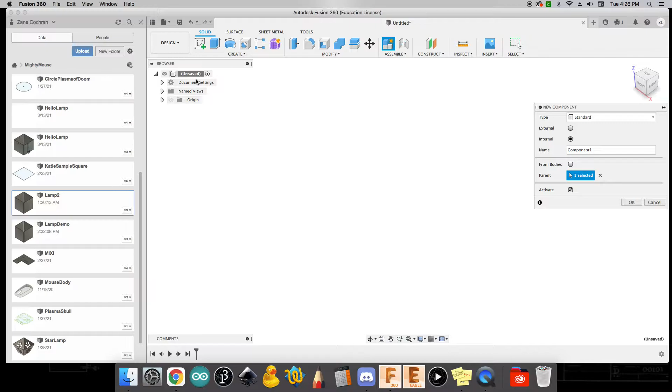So the first thing that we're going to do is we're going to go into our document settings and change our units over to inches. And then we are going to click here on unsaved and create a new component, and we're going to call this component lamp. Okay, at this point I'm going to go ahead and save and call this sample lamp.

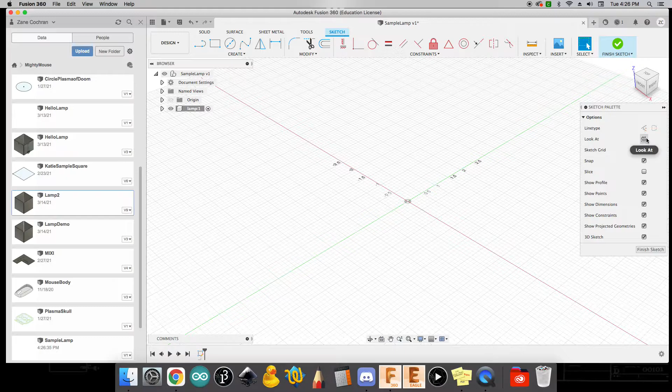And so now we're going to come over here to the sheet metal tool. We're going to create a sketch, and we're going to do that on the top face here. And I'm going to make a center point rectangle that's going to drag out to the center, and I'm going to set it to 3 inches by 3 inches. Okay, so at this point then I can finish the sketch.

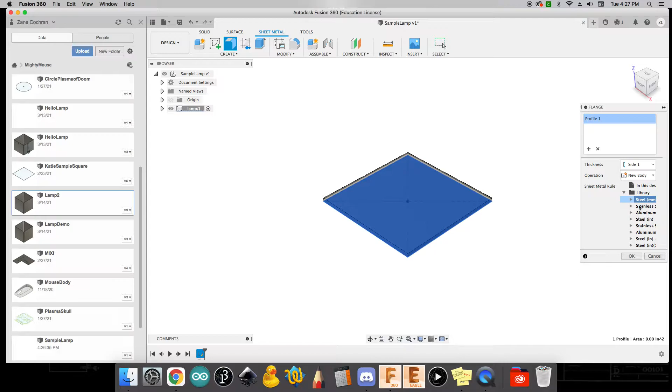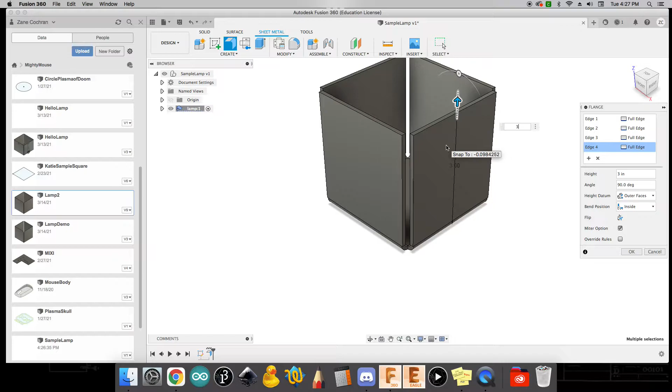And the first thing we're going to do is we're going to create a flange on this surface. And you'll notice it's going to pull up some rules here. We're going to talk about these in just a little bit, but we'll leave this as is for now. And we can click OK. The next thing that we're going to do is we're going to create another flange, and we're going to do it on these top 4 edges here. And we're going to drag these up an additional 3 inches. Okay. So here we can kind of see the sides of the lamp coming up.

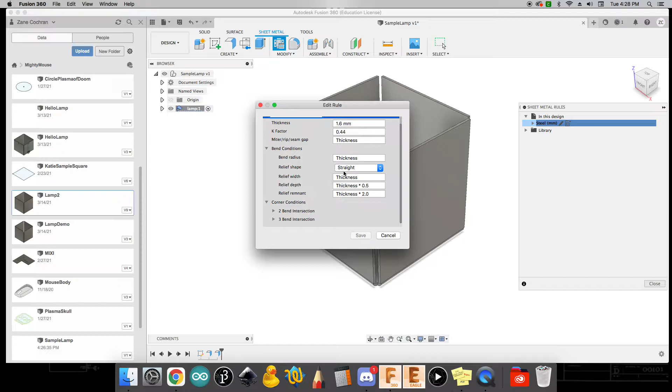Now at this point we are going to modify our sheet metal rules. We're going to click on our steel millimeters here, and we're going to edit this rule, and we're going to change the thickness to the actual thickness of our metal, which is 1.6 millimeters. So we'll click save, and you can see how it thins that metal out, and it's also leaving these openings as well. If we come into these, we can see some additional elements that we can change. For now, we're going to leave these as they are. So we can click close.

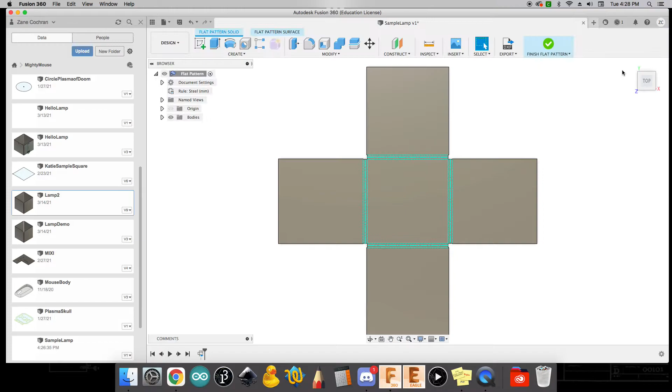At this point then, we want to visualize what this is going to look like when it's perfectly flat. And so we can create a flat pattern, and we can click on this stationary face here, and it's going to unfold everything relative to that face. And so now we can see that it's flattened everything down. And what we'll do now is we're going to right click on here, and we're going to create a sketch. And we can see that sketch right here. And we're going to start making some modifications to our design here.

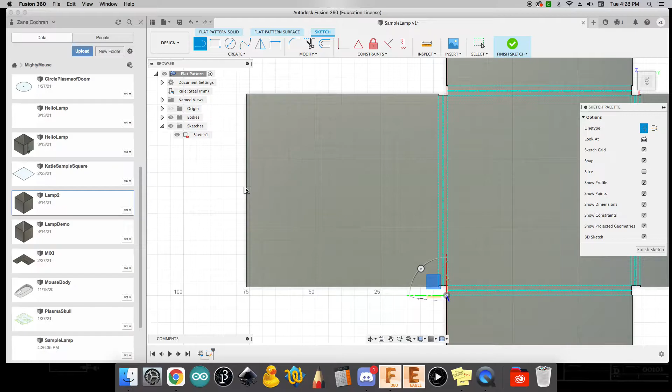The first thing we're going to do is we're going to create some lines just to keep track of where we are. And I'm going to come out to the middle of each edge, and I want to look for this center edge here. That should pop up. I see it almost there. Yeah, right there. And we are going to come in 90 degrees, and you'll see how it's wanting to work in millimeters, so looks like we need to go through and change our units one more time over to inches. Okay, so let's try that again.

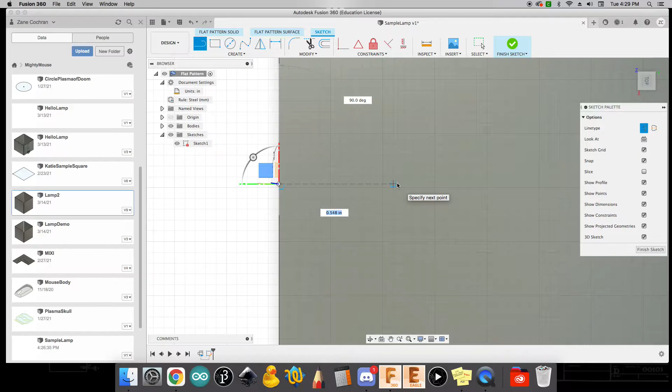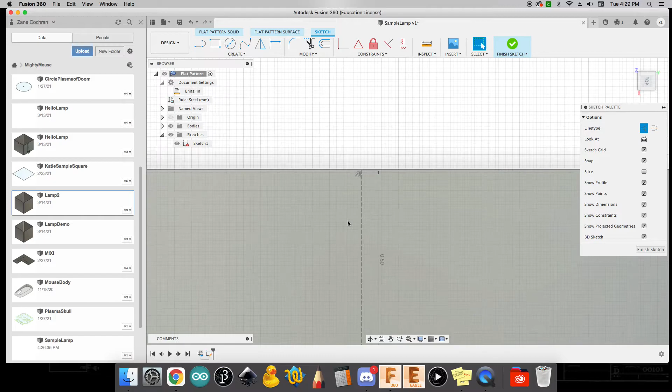So we're going to come into the center line here, and we're going to come in at a 90-degree angle, and we're going to come down half an inch, and we're going to do that on all the sides here. So it really wants to snap in right there. Okay, so again, coming in a half inch from each side. Okay, and one more.

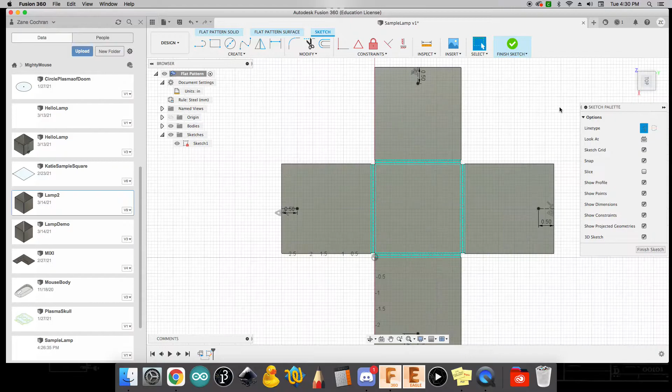Okay. Now at this point, we're going to make a circle, and we're going to take that off of the construction, and we're going to come in and put a circle at each of those points, and we're going to make those circles 0.25 inches in diameter. And these are going to be for the rivets that are going to hold our little shadow plates in place.

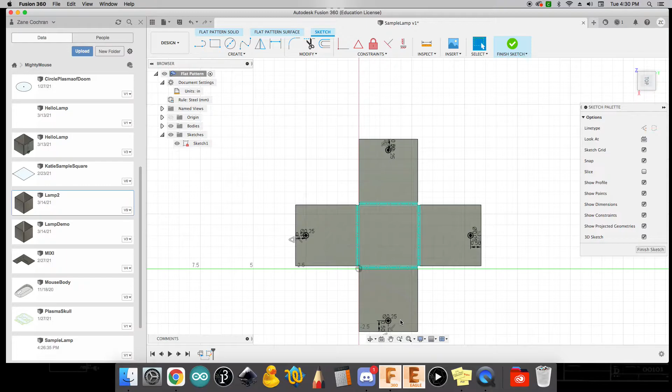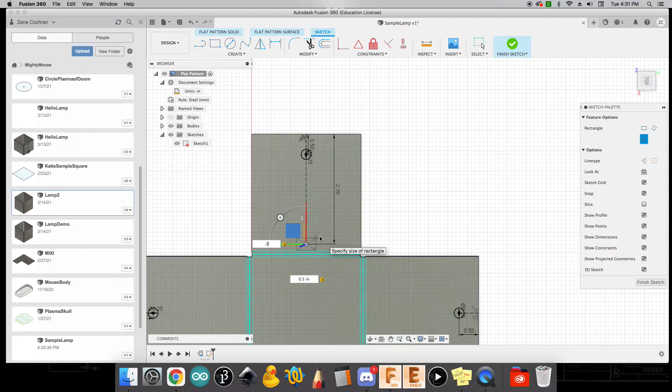Okay. And then last, we'll come up to this top edge, and we're going to do another construction line, and we're going to bring it down about 2.7 inches. And we're going to create a center point rectangle. We'll turn off the construction line. And here we're going to create a rectangle that is 0.5 inches by 0.3 inches. And this is going to be just big enough for our USB cable to pass through the center of.

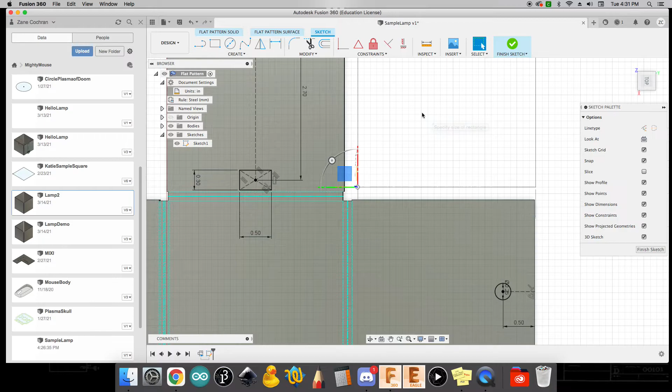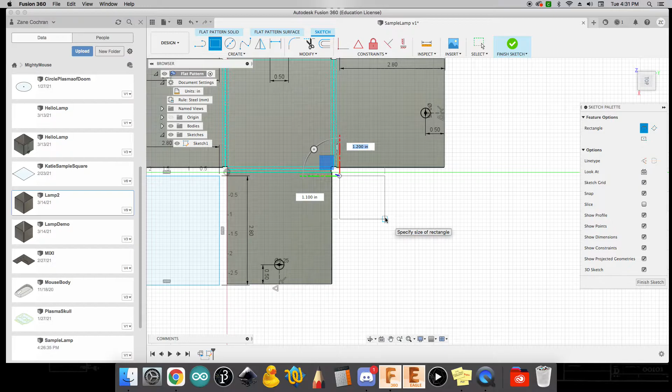Okay, so at this point we're making good progress. Next thing we're going to do is add in our 4 panels that will go on the top. That's going to have our designs cut into it. And so to do that, we'll create some rectangles here. And I'm going to make those 2.8 by 2.8 inches. And so I'll do a rectangle there. A rectangle there. A rectangle there. And one final rectangle there. Okay, so we're going to have 4 plates in total.

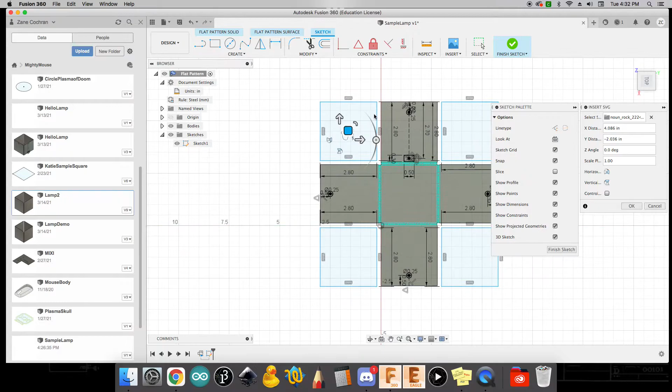What we can do now is we can actually go insert the SVGs that we downloaded from the Noun Project. And so we'll insert those from the computer. And the first one I've got is a rock. And so I'm going to kind of drag that over here. And I'm going to size that up as big as I can. So that'll make it easier for the plasma cutter to cut it. And so here's my rock, nice and centered. Okay, and I can click OK to insert it. And then I can come through and I can delete these extraneous items.

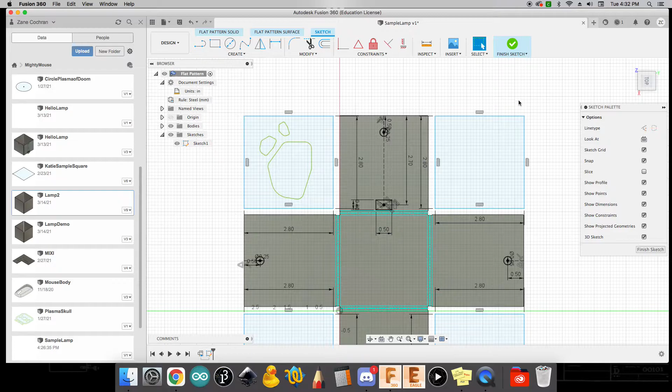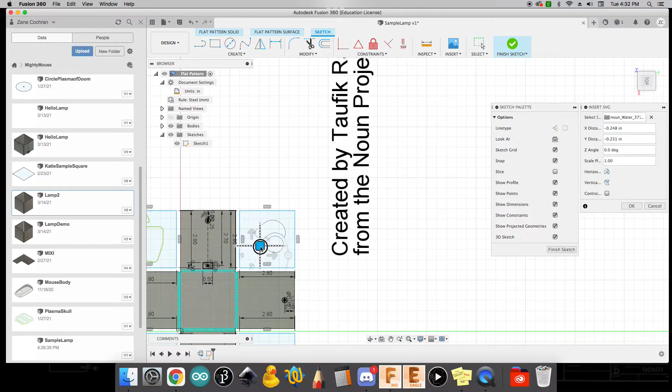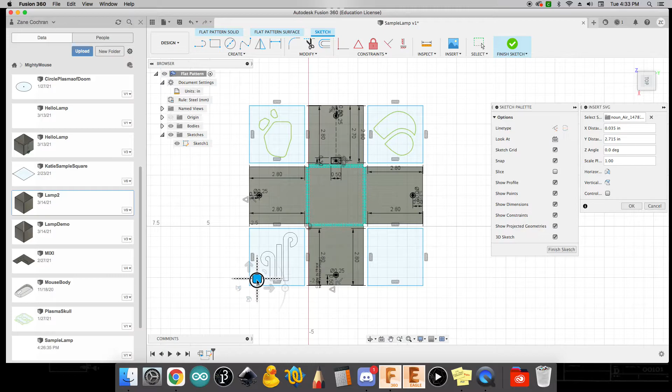So we'll come over here and we'll insert our next SVG. And it's going to be water. It looks like this one's going to have to get stretched an awful lot. That's okay. There we go. Click OK. And delete the extraneous text. Okay. We'll do it again. Okay. And we'll come down and we'll delete the text.

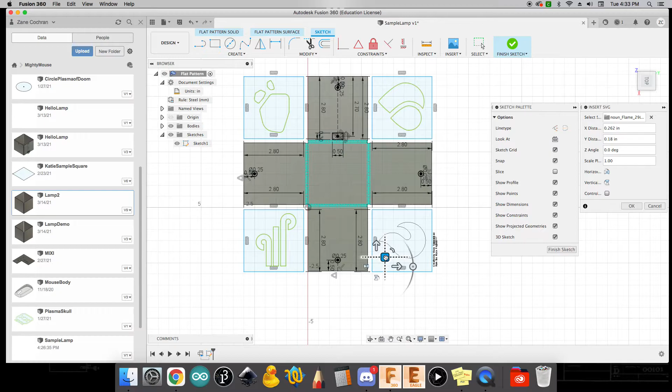And we've got one more. We'll insert our SVG. A little too big. Let's kind of do it right about there. Good. And we'll take care of that. Good, so now I've got my folded lamp. I've got my USB opening, I've got openings for rivets, and I've got my 4 panels that are all ready to go. So I can click Finish Sketch now, and I'm going to go ahead and save this.

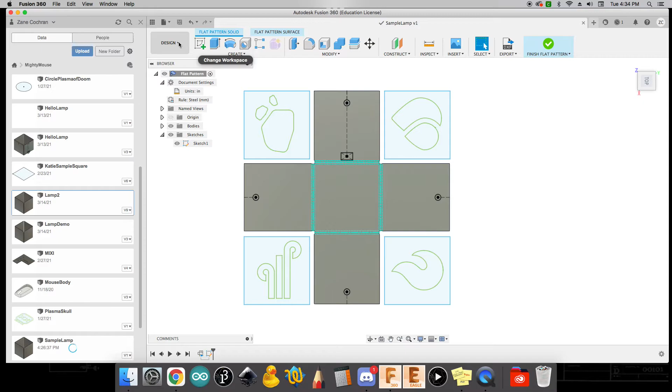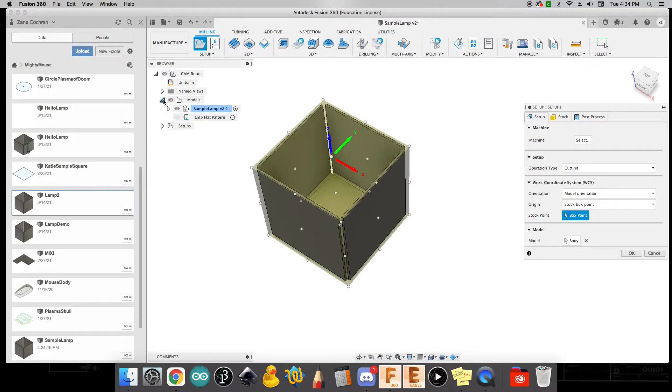Okay. Now at this point, I can go over to Manufacture. And we're going to change a couple of things here. So first, we're going to go over to our Setup and create a new setup. And we're going to change the operation type over to cutting, and that's going to be important because we want to be able to actually use the cutting tool. Okay, and so if we open up our models and then go to lamp flat pattern, now we can click on new setup again, and we can see that it's set up for cutting.

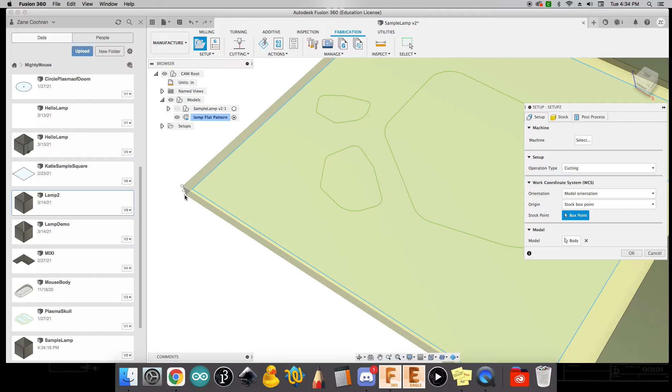For our model orientation, our stock box point, we want to select this bottom left hand point right here to move the X, Y, and Z over to that side. We'll go over to stock, and we're going to click no additional stock. And so we can see that our overall dimensions are just under 9 inches in each direction with a little bit of thickness. So we can click OK.

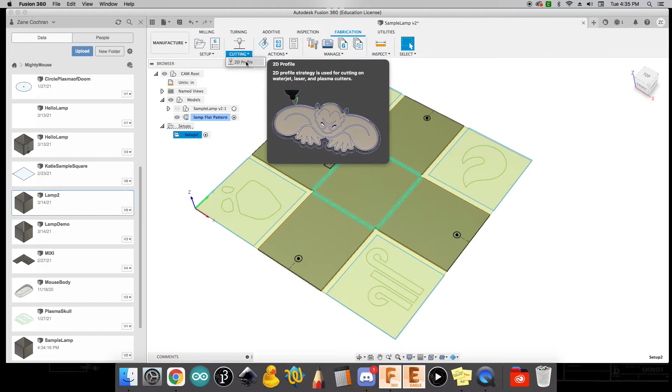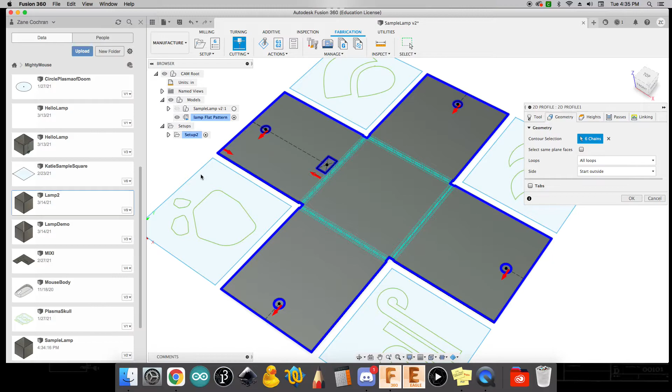Okay. Now at this point, we're going to go over to cutting and do a 2D profile. For the tool, we need to select the plasma cutter tool that you should have set up previously. Okay, we're going to change the cutting feed rate to 150 inches per minute. For the geometry, we're going to go and select all of the contours of our cuts. And so I'm going to start here, and I'm just going to select all of the bits that need to get cut out. And we'll talk about what side you should cut on in just a moment, but just go ahead and select all the different edges that are going to need to get cut.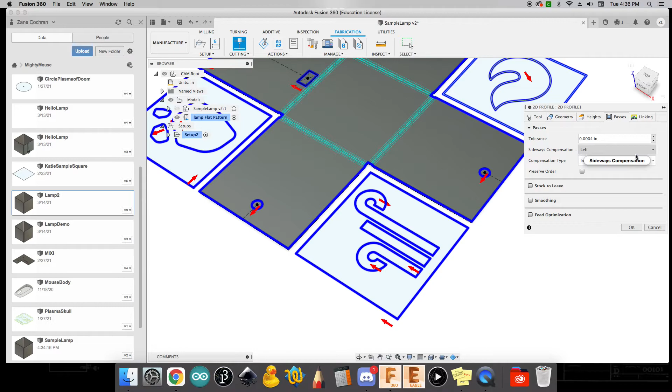Make sure you don't forget any. Good. We're going to skip over heights. We don't need to do that one. For the passes, we're going to do in computer control. For linking, we're going to click keep nozzle down and change the maximum stay down distance to 24 inches. And we'll change the stay-down feed rate to 300 inches per minute.

We don't need any lead out, but we do need lead in. And we're going to leave this lead in radius to 0, but we're going to change this to 90 degrees and the lead in distance to 0.15. We're going to try that. We may need to adjust that a little bit later on. If you want to choose where the plasma cutter starts cutting in, you can choose entry positions, but I'm going to let it do that automatically for now and see how it does. So I'm going to click OK.

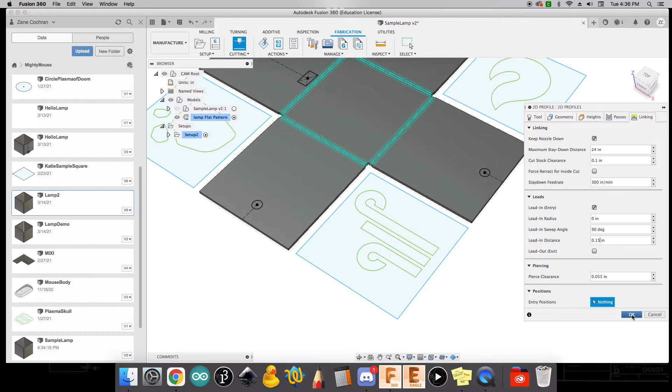It's going to go through and try to calculate all the paths. Okay. And we don't see any errors, but we need to go check to see kind of where it's cutting in on things. So here, on the inside of this rock, you can see how it's going to start cutting in. This is called the lead-in. It's where it starts cutting in and piercing in the material, and then it cuts everything out. This is good to have the lead-in here, because this piece is going to get thrown away.

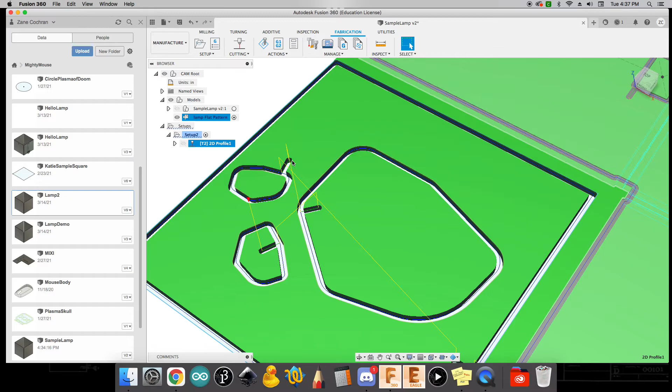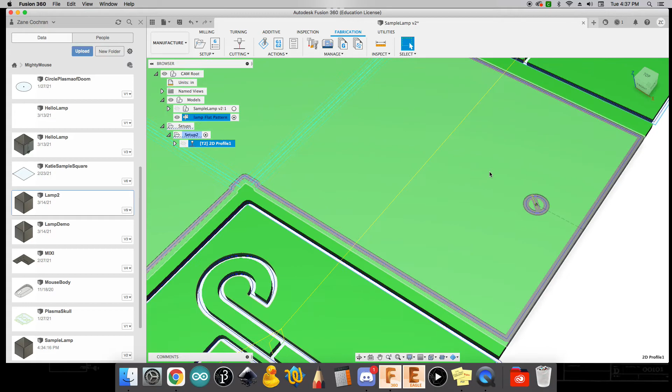On this side, however, this is bad, because this is going to cut into my overall plate, and so I'm going to need to change this one. So let's kind of see other places where that may be messing up. You can see here that that's having problems. Here's a problem. Okay, looks like here's a lead-in issue. There's a lead-in issue. Okay, there's a lead-in issue. So we're going to go back and examine to make sure that we fix these small little issues. So we're going to start with this panel. So we need to look at this rock and then this square.

So if I right-click here and click Edit, and if I go back to my geometry, you can see how this arrow is on the inside. We actually want that to be on the outside. That's going to be the side that it kind of biases toward. So same thing with this one. And so now, if I click OK, we should see that now those lead-in issues have been resolved. So let's kind of keep looking around. So I see that there's an issue here and here.

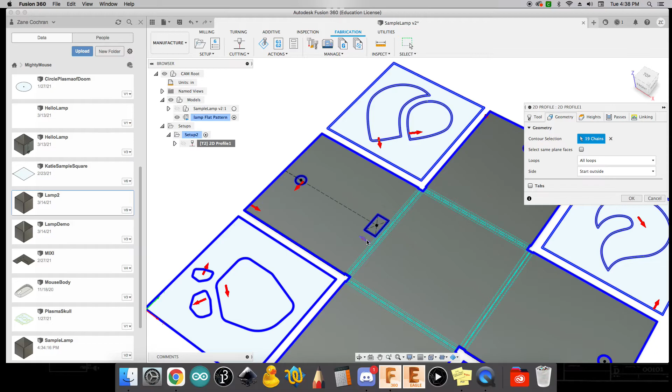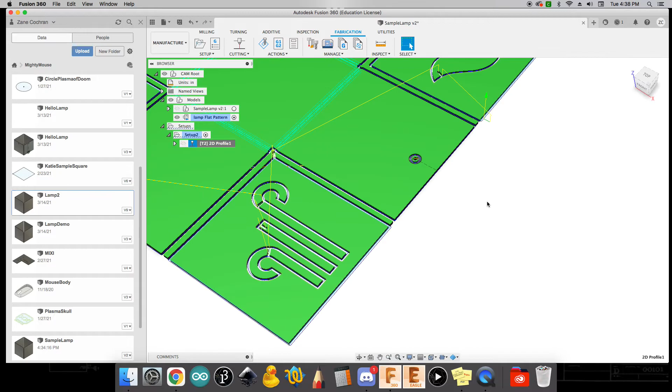So let's go ahead and we'll click Edit again and go over to Geometry. Okay, so we want that to cut from the inside, and we want that to cut from the outside, which is good. Okay, this one needs to be cut on the outside, and that needs to be cut on the inside. So let's see if that solved all of our lead-in issues. Okay, so now all these are being cut. That's good. This one looks good. Yeah, so I think we've solved most of the issues here. Yeah, that looks good.

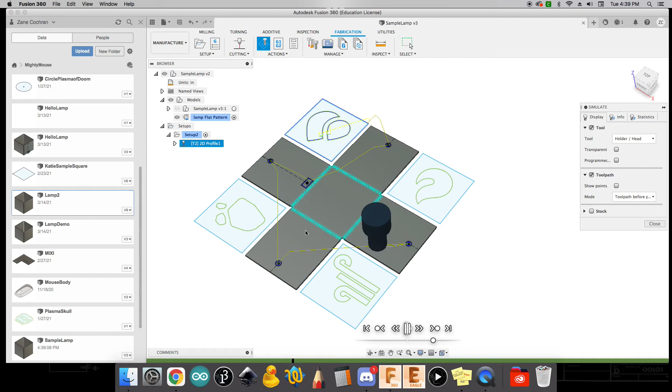Okay, so at this point it looks like it's actually cutting correctly. And so we're going to save one more time. And now we're ready to do our post-processing. So if we come over here, we can look at the Simulate tool, and we can actually hit play on this and watch it cut all of our pieces out just to make sure that it's cutting in the way that we expect it to cut. And again, you're looking at those lead-ins to make sure it's not cutting into any pieces that you want to keep at the end. And so we can speed this up, make sure it looks okay. Okay. And that looks good. So we can go ahead and close that.

We'll go to the post-processor. And at this point, we're going to open up our properties. And we're going to check a couple of things. We want to check that we're using the Fire Control Plasma post-processor. We want to make sure that IHS is either unclicked or set to no or false, and same as THC. That should be unclicked and set to no or false. We want to make sure that our pierce delay is set to 1 second. This is how long it is going to burn into the material before it starts cutting. But if that looks okay, then we can click OK.

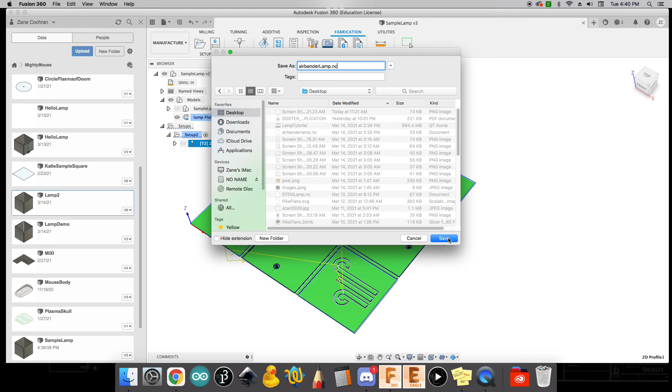I'm going to save this to my desktop as my airbenderLamp.nc. You can call yours whatever you want as long as it ends with .nc, and that should be good. So we will click Save. And I'm going to send this out over to the plasma cutter on the file server and get ready to cut. And that's it.